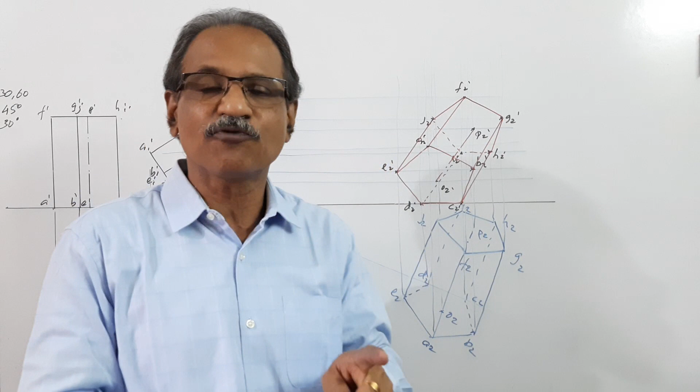The question: a pentagonal prism, 30 mm side of base and 60 mm axis, is standing on HP on an edge of base with axis making 45 degrees to HP, and the edge on which it is resting on HP makes 30 degrees to VP. I repeat the question: a pentagonal prism 30 mm side, 60 mm axis stands on HP on an edge of base with axis making 45 degrees to HP and the edge which is resting on HP making 30 degrees to VP.

I am going to draw this by the redrawing method. I have drawn the simple position plan and elevation, keeping the edge CD perpendicular to VP. Points A, B, C, D, E, F, G, H, I, J, axis O, P, and their corresponding dashed points A', B', C', D', E', O', F', G', H', I', J', P' — this is the simple position plan and elevation with one edge CD perpendicular to VP.

Then I redraw this elevation with this corner, which is the edge CD. C', D' are redrawn as C1', D1' on the XY line, and the shape is reproduced so that the axis OP, now O1', P1', makes 45 degrees to HP. I have redrawn the same elevation geometrically with axis making 45 degrees to HP, and now project a new plan.

How will you project a new plan? Draw vertical projectors, draw horizontal projectors, and you get the new plan. This is it: A1, B1, C1, D1, E1, F1, G1, H1, I1, J1, axis O1, P1. All visible edges are firm, all invisible edges are dotted.

Now how is the prism positioned? The prism is standing on HP on a side of base with axis making 45 degrees to HP, and the axis parallel to VP, or the edge on which it is resting perpendicular to VP. But the question says the edge on which it is resting has to make 30 degrees to VP. What do you have to do?

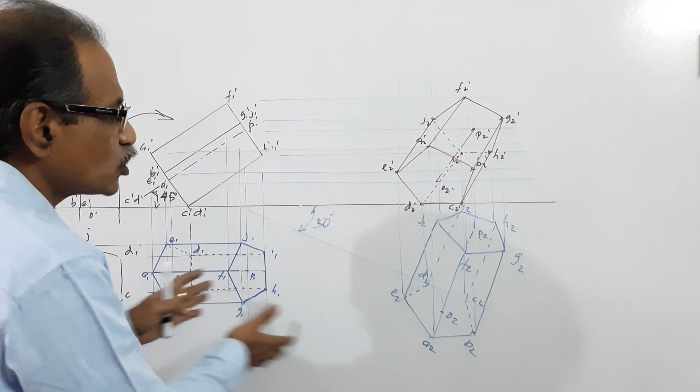You have to redraw this plan, in such a way that the edge CD, marked here as C2D2, makes 30 degrees to XY. What do you do? Draw a 30 degree line to the XY line. Choose any point, draw a line at 30 degrees, and on that line choose C2D2. Reproduce the whole plan.

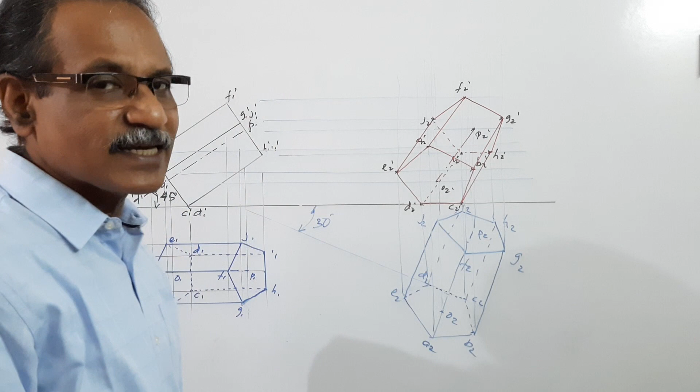Redrawing the whole plan in the correct shape is a slightly tedious one, but you have to draw it fast. So redraw the plan, then draw vertical projectors and horizontal projectors. For example, a vertical projector through A2 and the horizontal projector through A1' meet at A2'. Vertical projector through B2 and horizontal projector through B1' meet at B2'. Similarly get C2', D2', E2', O2', F2', G2', H2', I2', J2' and P2' — all 5 plus 5 plus 2, 12 points.

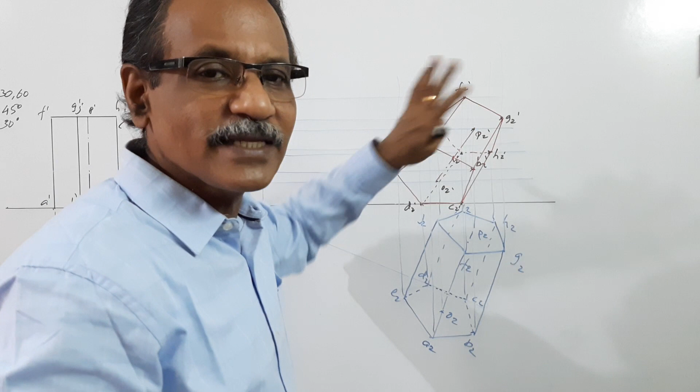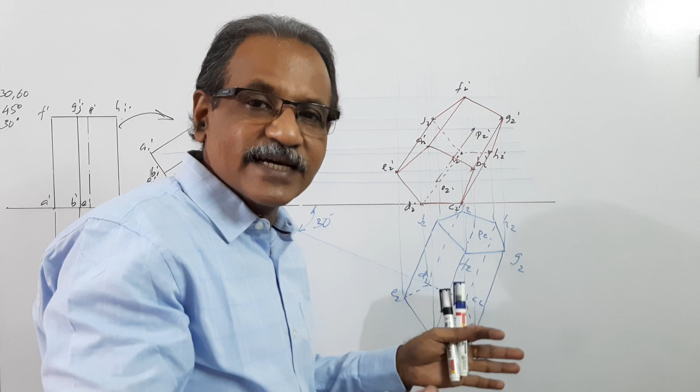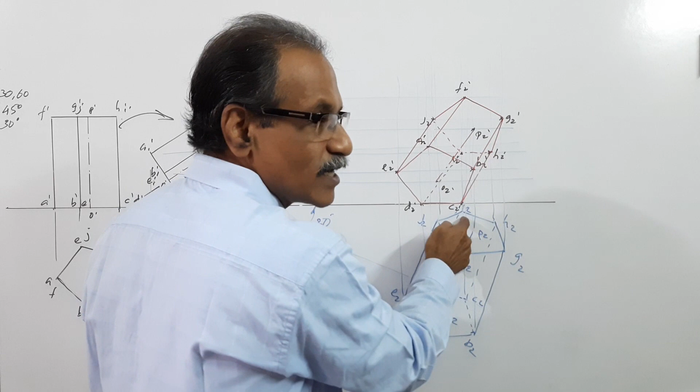After locating the points, you have to connect them. Since the base is nearer to the observer and the top is nearer to VP, whatever is nearer to the observer will be visible. The base — A2', B2', C2', D2', E2' — make it firm. The corner C is far away from the observer, nearer to VP, so that will be invisible. C2' is invisible, J2' is invisible, I2' is invisible, and the lines from these points will be invisible; all other lines will be firm.

Agreed? This is the redrawing method.

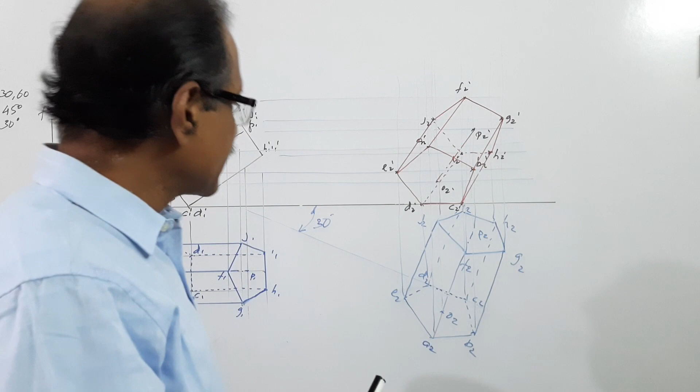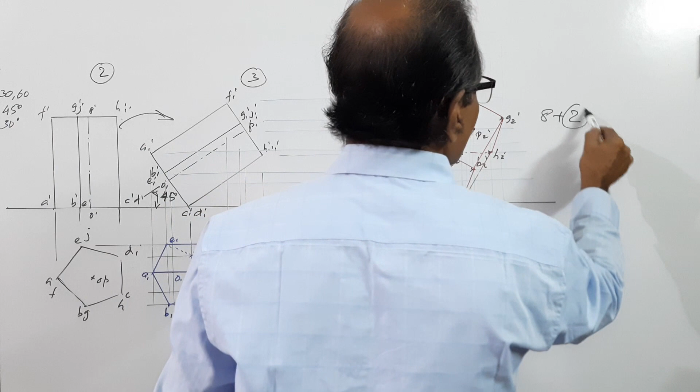If such a question comes for the university examination, the usual mark pattern for a 10 mark question is: 2 marks allotted for the simple position, 3 marks for the subsequent position, and 3 more marks for the final position — 3 plus 3 plus 2 is 8, plus 2 marks for dimensioning and neatness. This is the dimensioning expected from you.

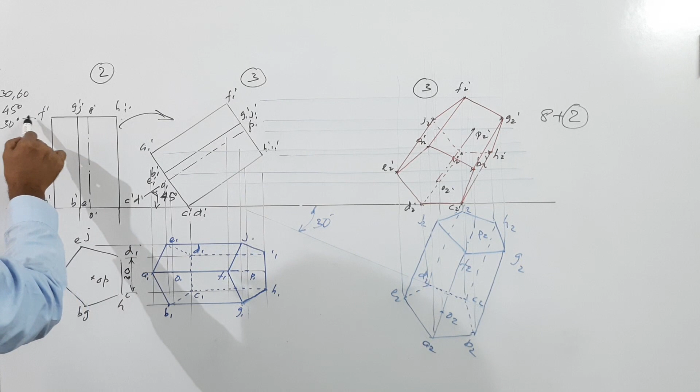This distance is 30, this height is 60, and this angle is 45 degrees, this angle is 30 degrees, and so on.

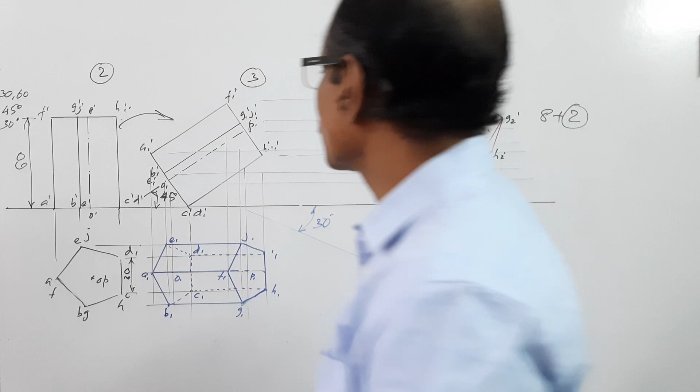Now, if you draw this problem by the auxiliary projection method, which is comparatively easy, instead of redrawing these views, you draw auxiliary XY lines — new XY lines representing HP and VP according to the requirement. So this is the simple position, no change in the simple position. Then we draw a new line, X1Y1.

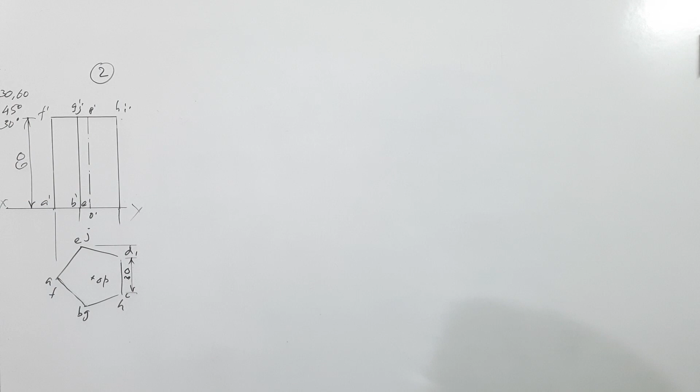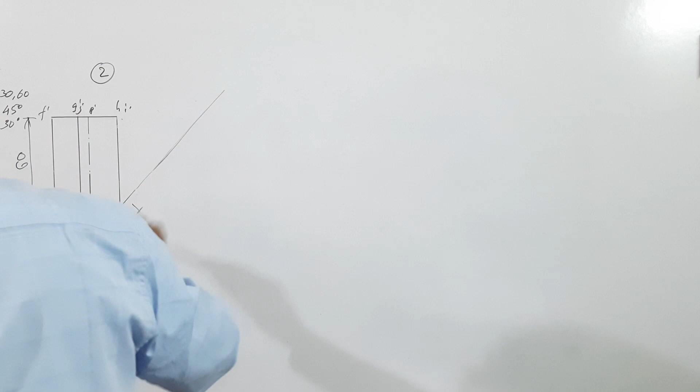We draw an x1, y1 through this particular point, which is C dash D dash. We draw an x1, y1 through C dash D dash.

Then what do you do? How do you draw it? You ensure that this angle is 45 degrees.

Then draw a new plan. How do you draw a new plan? Draw projectors perpendicular to xy line, x1, y1. Draw projectors perpendicular to x1, y1.

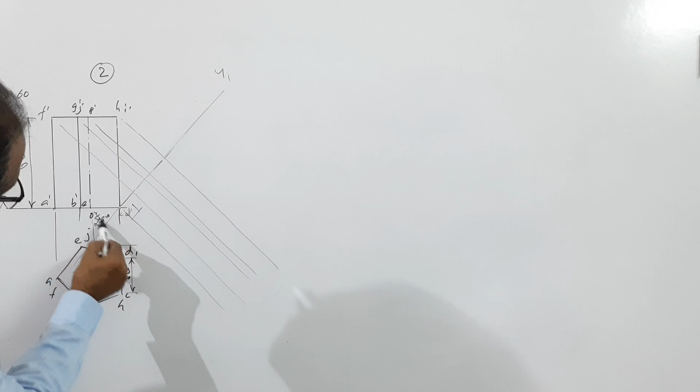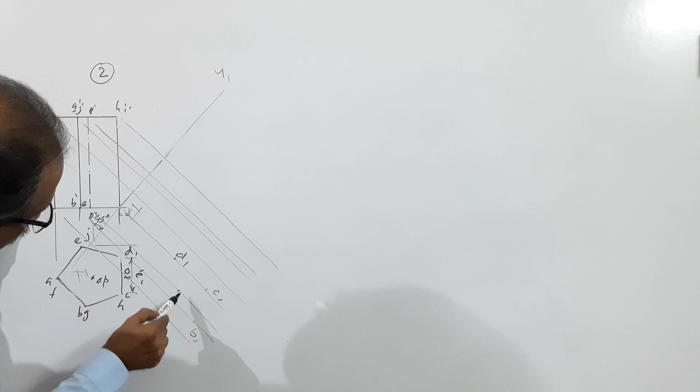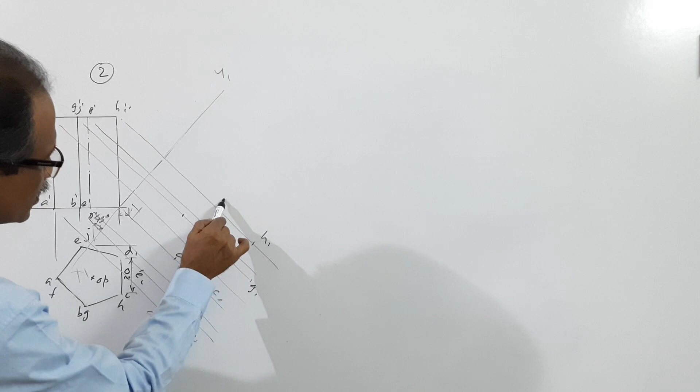From all points of the elevation, take the distance to the plan and mark on them. You will get A1, B1, C1, D1, E1, O1. I am marking the points without taking dimensions because it's not easy to make correct dimensions. These are the points F, G, H, I, J, P1, O1.

Now you are looking in this direction. The top will be visible. Make the top firm.

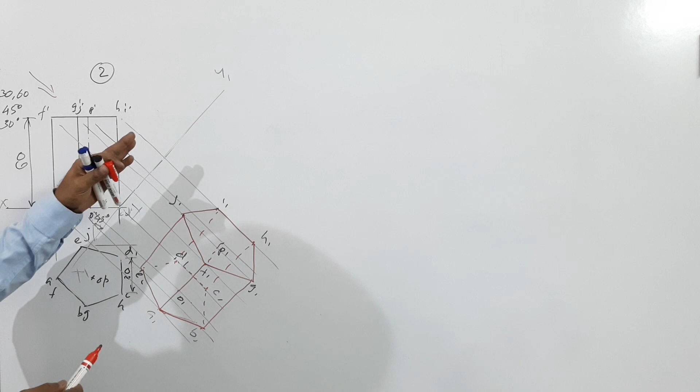We have redrawn the plan. Now if you take this plan and elevation, the prism is standing on HP on an edge of base, and the axis is making 45 degrees to HP. The edge on which it is resting is perpendicular to VP. The edge has to make 30 degrees to VP.

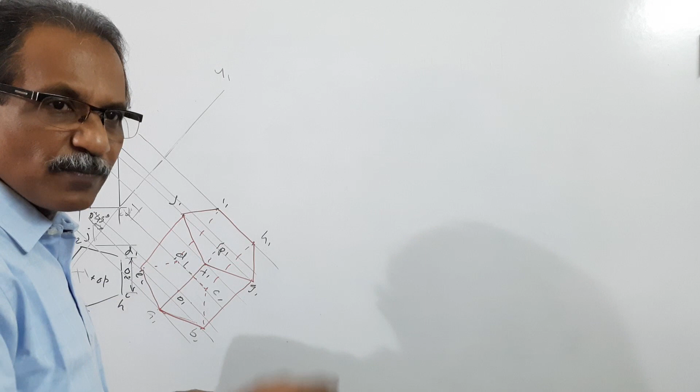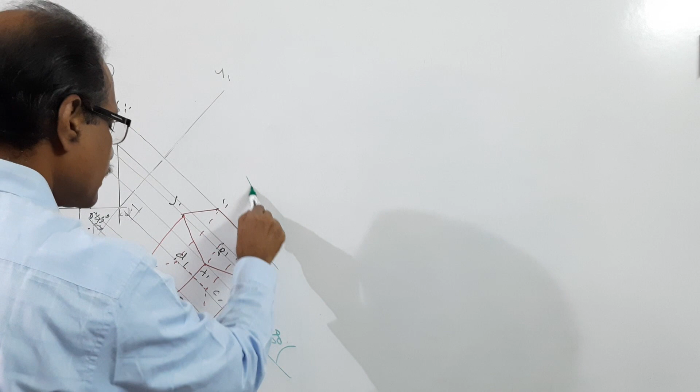So what do you have to do? You have to draw a new x2, y2. Where is it? The new x2, y2 is drawn at 30 degrees to the edge C1, D1, and draw a new elevation.

How do you do that? Draw projectors perpendicular to x2, y2 from all points in the auxiliary plan.

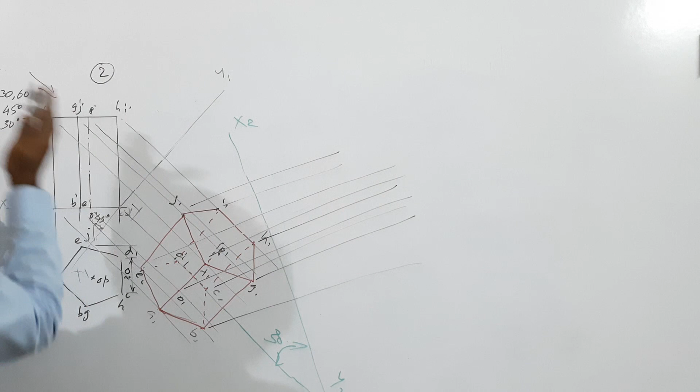Then take the distance of the first elevation from x1, y1 and mark on the respective projector. This is C dash D dash, 0 distance. So on this projector you have got C1 dash. On this projector you have D1 dash.

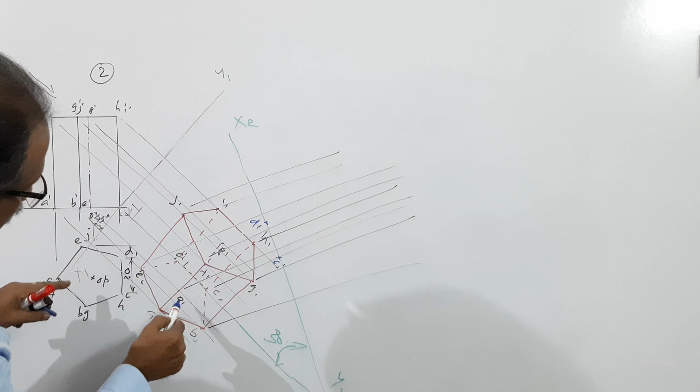Then A dash, this far away. On the projector through A, I have A1 dash. On the projector through B, I have got B1 dash. On the projector through E, I have got E1 dash, A, B, C, D.

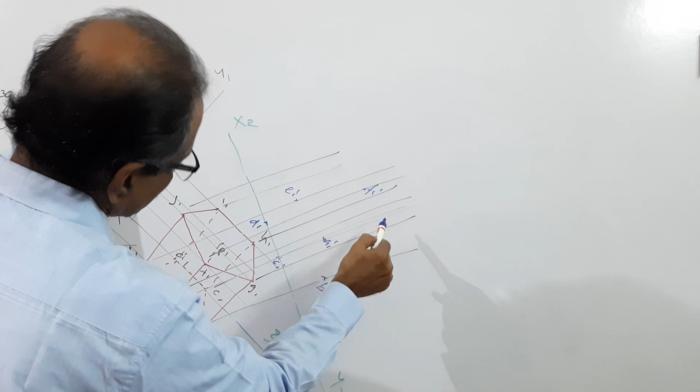Then on the projector through F, I have got F1 dash, G1 dash, F, G, H, H1 dash, I1 dash, and J1 dash. Somewhere you will get P1 dash, and somewhere also you get O1.

Now you have to connect. All visible edges are firm and invisible edges are dotted. When you are looking in this direction, the base is nearer to the observer, so the full base will be seen.

Since I am not following the correct dimensions, the shape will have some problem.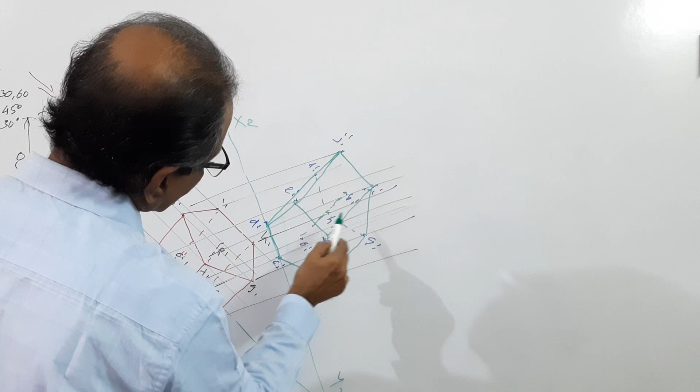Plan, XY, elevation. Plan, XY, elevation. Plan, XY, elevation.

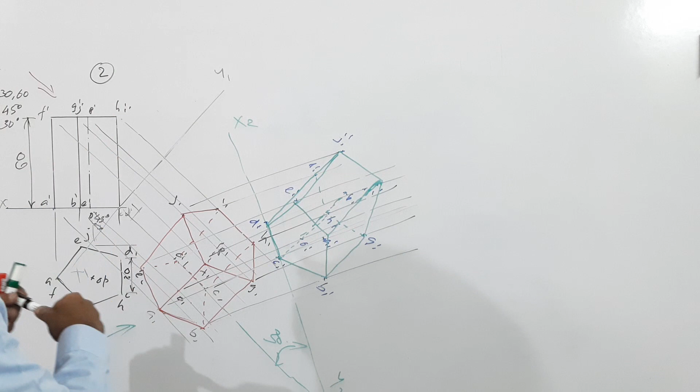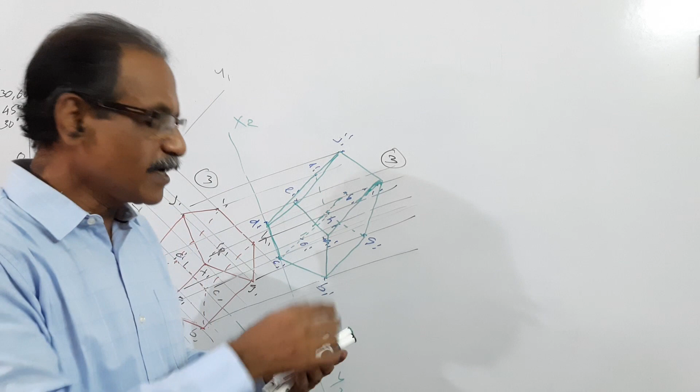This method is faster because the redrawing aspect is not necessary. We can draw only 4 drawings: plan, elevation, auxiliary plan, and the new elevation. When you give marks for this kind of solution, 2 marks for this, 3 marks for this auxiliary plan, and another 3 marks for this final elevation. That is how the mark allotments are usually made. The remaining 2 marks will be given for dimensioning, neatness, labeling, angles, all dimensioning, neatness, positioning, judgment, and spacing in the sheet, etc.

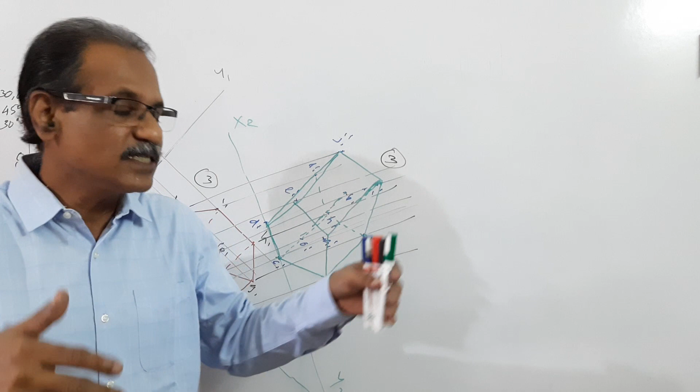Okay, that is the first question in the second module. The second question in the second module is a square pyramid suspended on a corner of base, with the axis making some angle to VP.

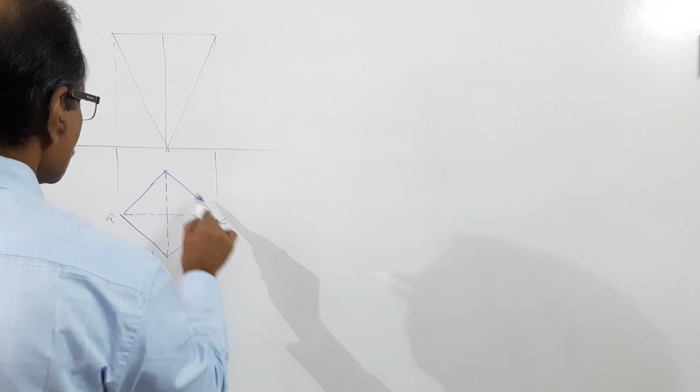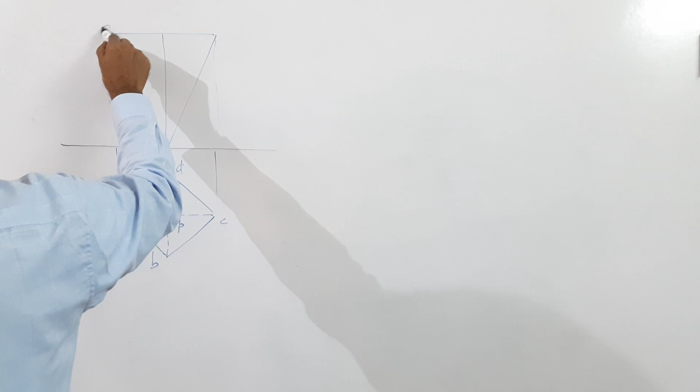I have got the simple position: the pyramid resting on HP on a corner, with the base on the top, with the corner A clearly available on the left side. When I am suspending it, what happens? The point of suspension and G dash, the center of gravity. Where is the center of gravity? It is 1/4 from the base.

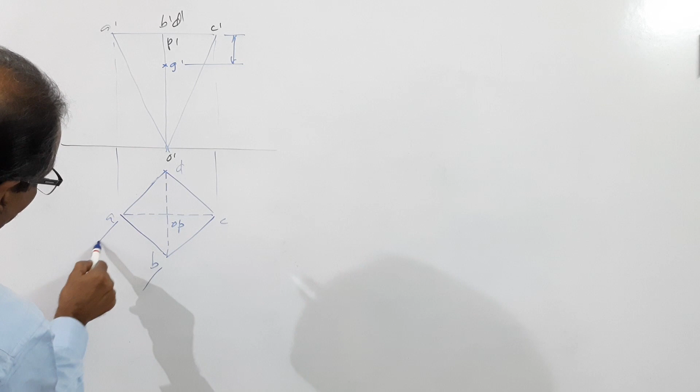The dimension of the pyramid is 40, 60. This is 40 and this is 60. So this is what? 15.

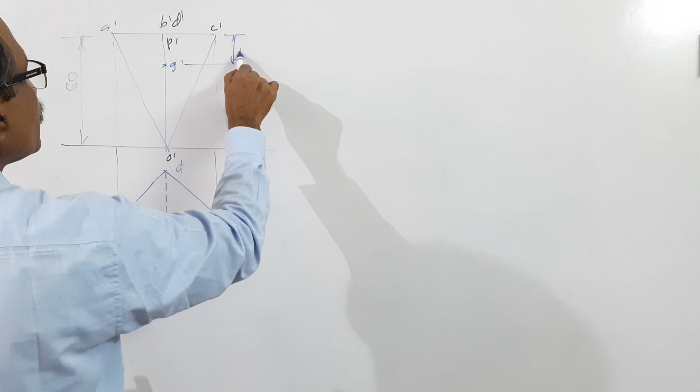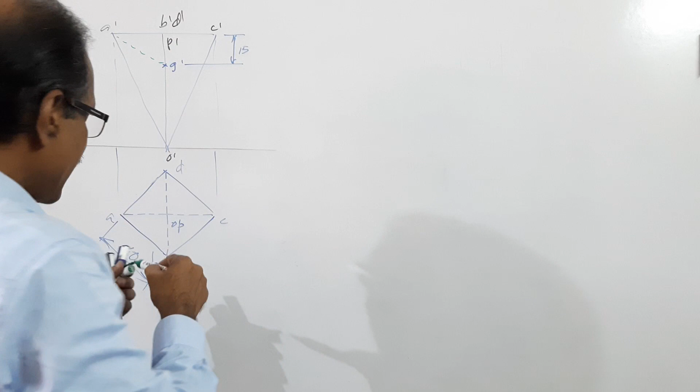This is 15. Okay, you have to redraw this elevation with A dash G dash making vertical, or 90 degrees to HP. That means A1 dash G1 dash. Agreed?

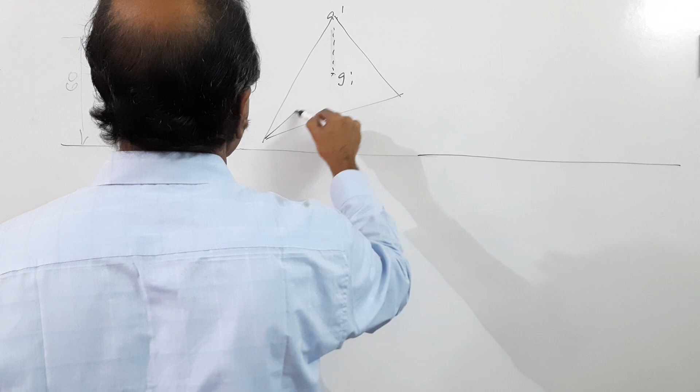What is this? This is approximately, not drawn to dimension, this is approximately the elevation redrawn such that this line becomes vertical. Agreed? A dash G dash, A1 dash G1 dash become vertical.

Now what? Draw a new plan. Draw vertical projectors down. Draw horizontal projectors. What do you get? You get a new plan.

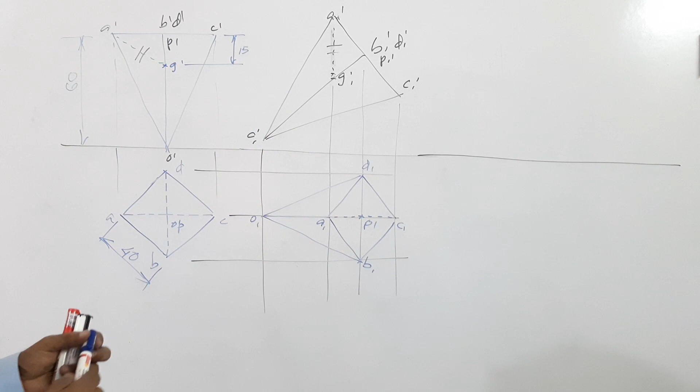A1, B1, C1, D1, O1, P1, O1. You have got the new plan. Now, the question says the plan of

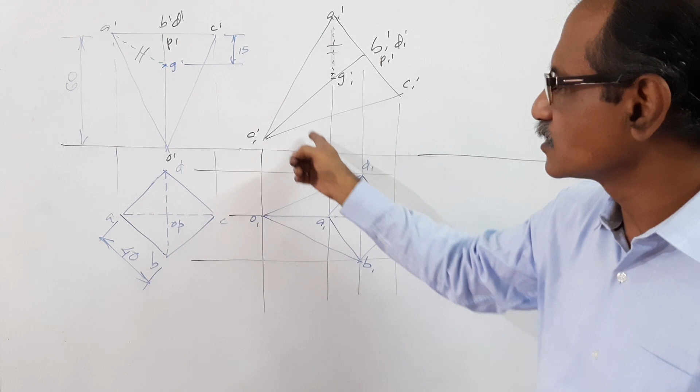The axis makes 50 degrees to VP. What is the inclination of the axis to HP now? This is that angle. I don't know how much that angle is. Maybe something around 40, nearer to 40.

Now, you have to redraw this plan such that the plan of axis makes beta to XY line. We don't know how much is beta. Phi of the axis is given. From the given value of phi, you have to find out beta.

What do? Draw a line. You can make a separate construction if you want, or you can make here itself. Draw a line at 50 degrees. Phi equals 50.

Take the true length of axis and mark a line. This is true length. Draw a locus. Take the plan length of axis, O1, P1. Cut an arc. You will get a line.

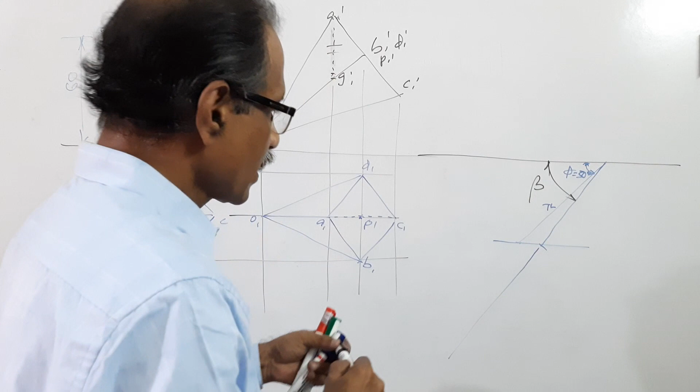Agreed? Now extend this. This angle is called beta. Around this, construct the new plan. How do you construct it? You can construct it inside or outside if you want. I will construct it here.

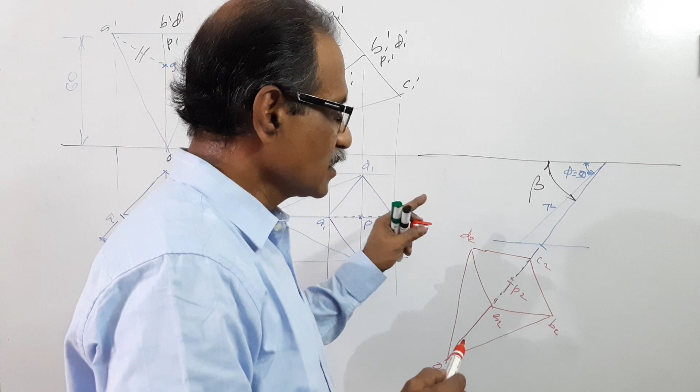I call this A2, B2, C2, D2, O2, P2. What is this? This is the final plan. It satisfies the requirements. The axis makes 30 degrees to VP. The actual angle which you have drawn here is the apparent angle equal to beta, which you have found out.

Now, draw vertical projectors up. Draw horizontal projectors. Locate the points O2, O1 dash, O2 dash,

O2 dash, D2 dash, C2 dash, B2 dash, A2 dash, A2 dash, B2 dash, C2 dash, D2 dash. Okay, connect them. The base, the apex is nearer to observer, base is nearer to VP.

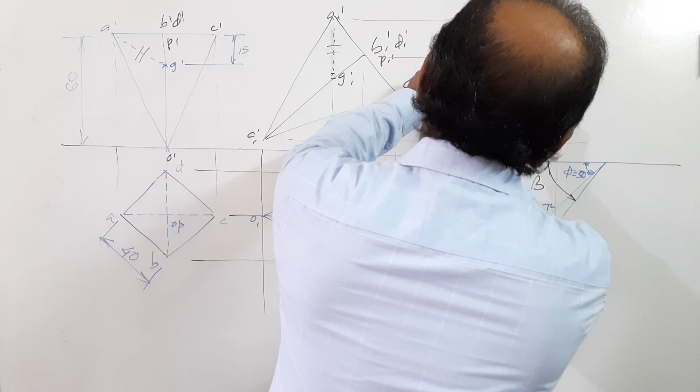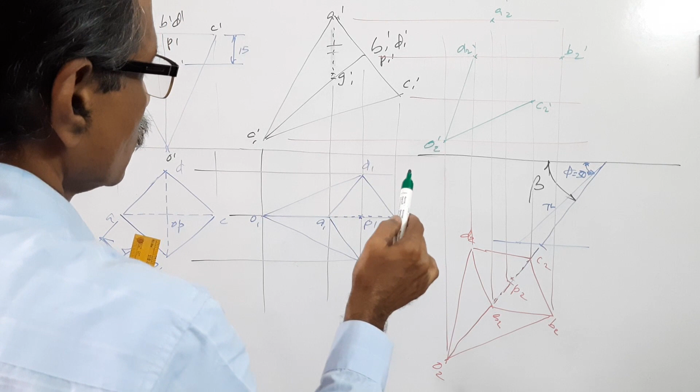Therefore, the full base will not be visible. Something is wrong. A2, B2, C2, D. Okay.

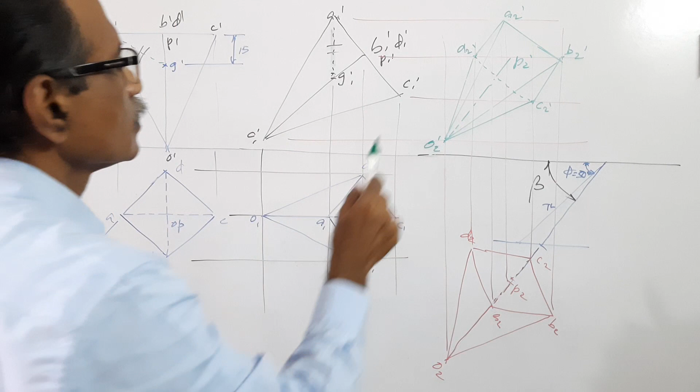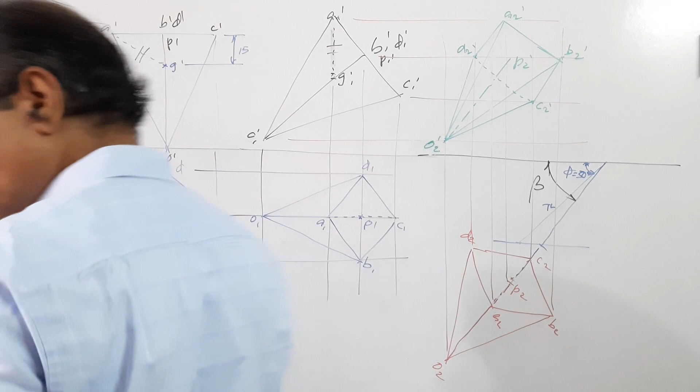Okay, something like this will be the elevation. You are right on the plan and you have projected the elevation. Since I am not following dimensions, there will be slight difference in the shape.

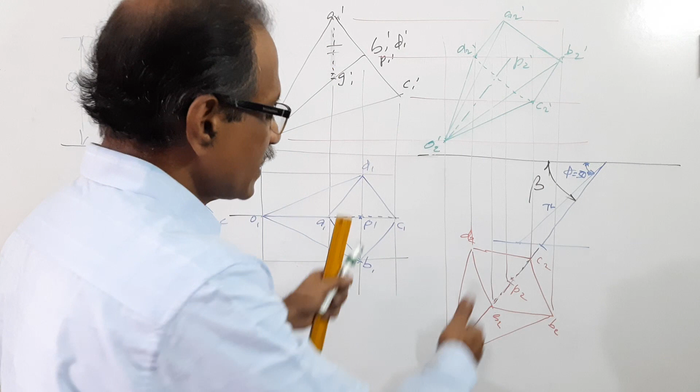The apex is brought nearer to HP and nearer to observer. The base is brought nearer to VP. Since you are not following dimension, there will be slight change in the dimension. But this is the procedure with which you have to draw.

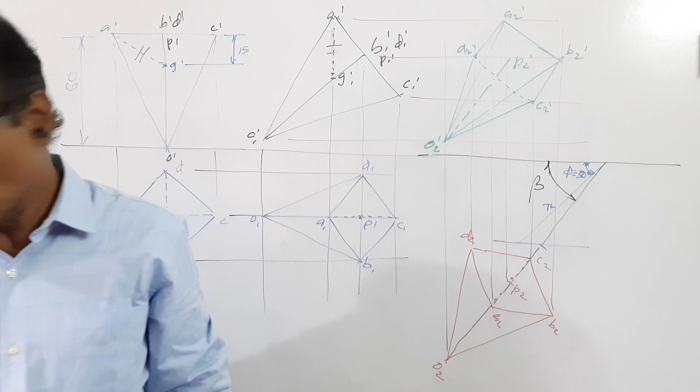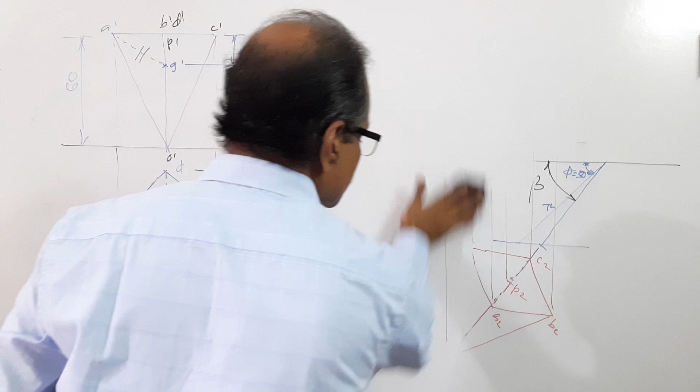Now, if you draw this by auxiliary projection method, the drawing is very, very easy, or the time consumed will be comparatively less. And for those students who have drawn this by auxiliary projection method, I am drawing the shape for you to recall. This is XY line.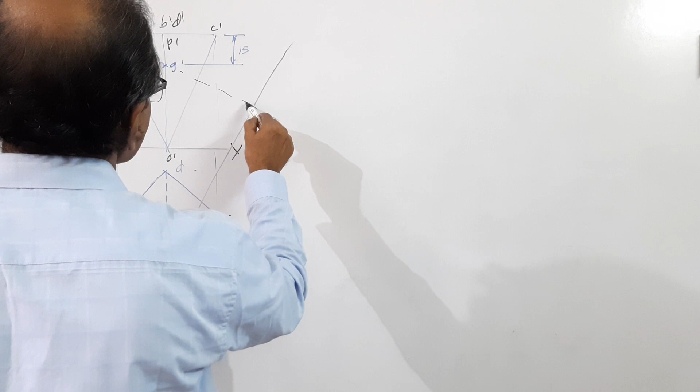I extend this, draw an X1, Y1 at 90 degrees to that. X1, Y1, draw a new plan. And drawing a new plan. This is the new plan.

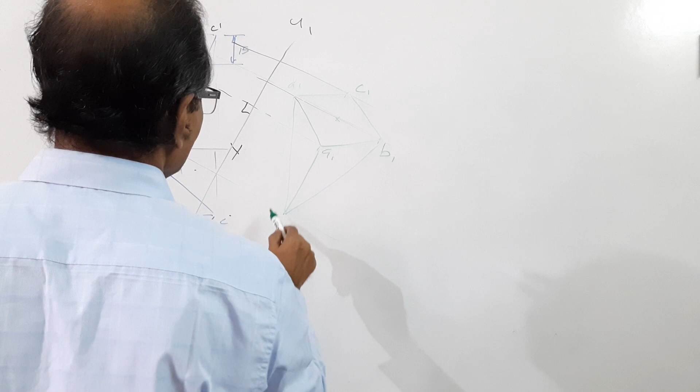A1, B1, C1, D1, O1, P1. The pyramid is suspended now. The pyramid is suspended.

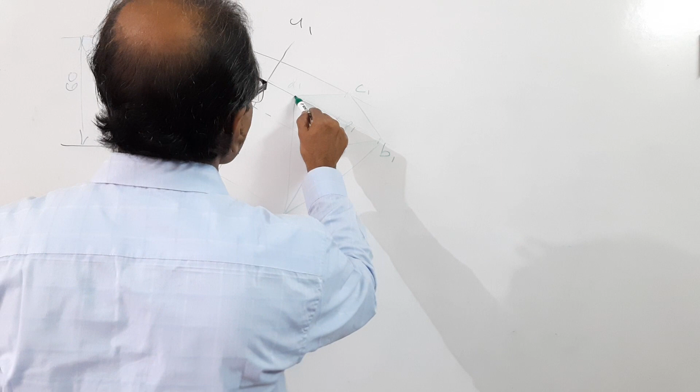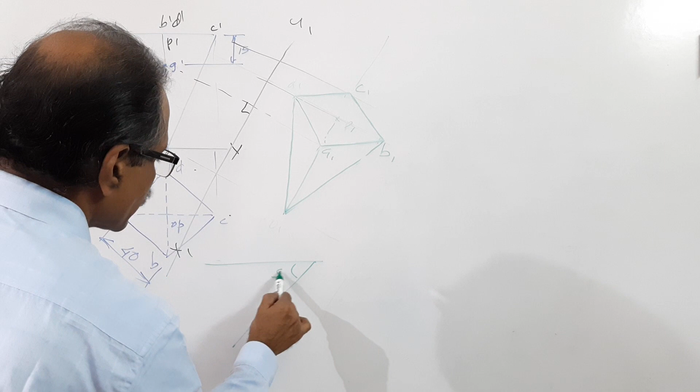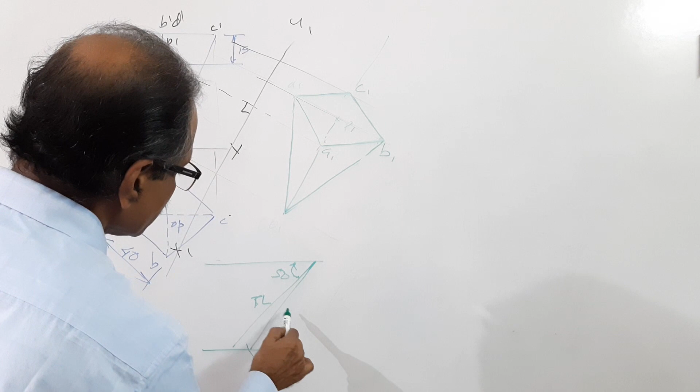Now, I extend this, find out beta by a separate construction. Take a line at 50 degrees, I draw a line, this is true length of axis, this is the locus. Take the plan line, this is the plan line, and cut - I get this plan line. This angle is called beta.

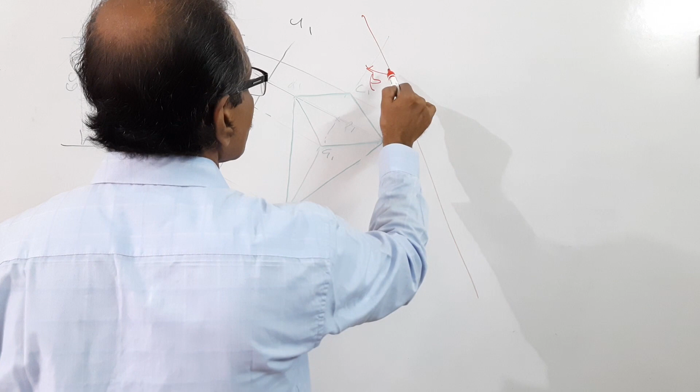Take that beta and draw a line, X2, Y2. Draw projectors perpendicular to X2, Y2. O2, O1 dash is this far away, so this is O2 dash. C dash is this far away, so this is

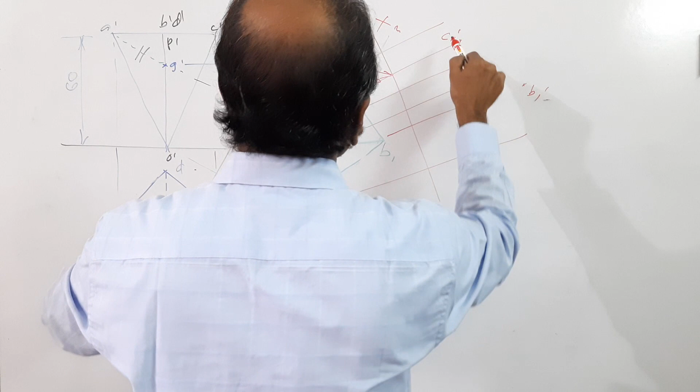C2 dash. B dash is this far away from X1, Y1, so on the projector through B, somewhere here is B2 dash, B1 dash - 1 dash is sufficient, D1 dash, C1 dash, at a similar level D1 dash. A is far away, so somewhere here is A1 dash. Connect them.

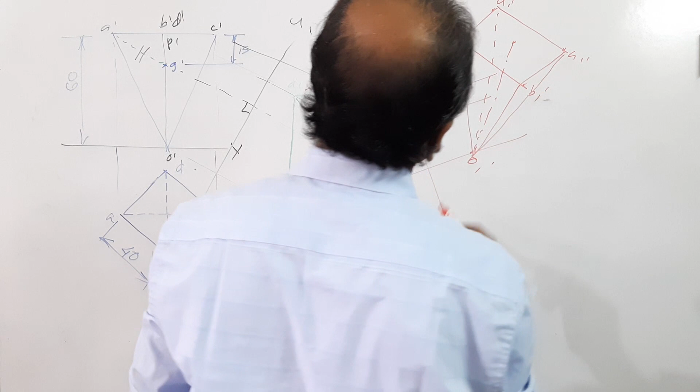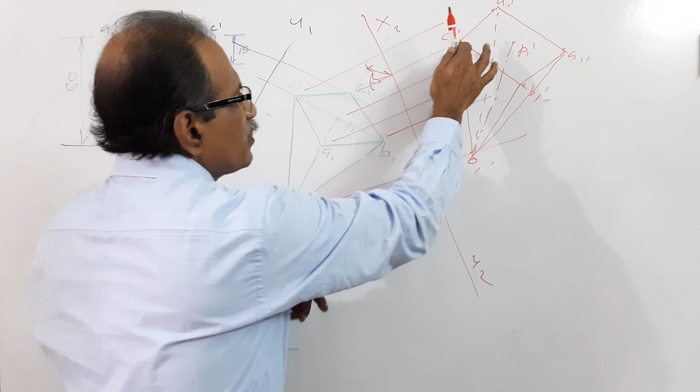A1 dash, B1 dash, C1 dash, D1 dash, O1 dash, P1 dash. That's the shape of the elevation. The apex is nearer to the observer, the base is nearer to VP, therefore this will be invisible.

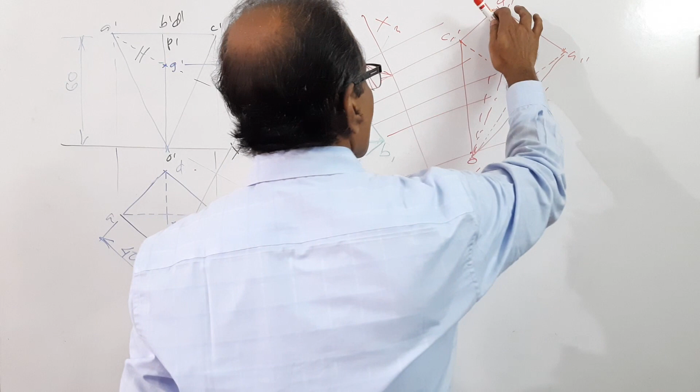This also will be invisible. This I drew first will be visible actually. This will be visible. So this is the shape of the elevation. Simple position plan and elevation, auxiliary plan and the final elevation.

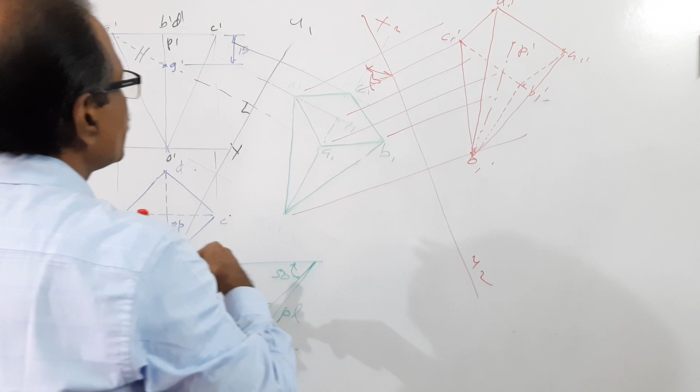What is the mark allotment? 2 marks? 3 marks? 3 marks - 2 marks for neatness and dimensioning. You can judge how much you are going to score. Okay, thank you.